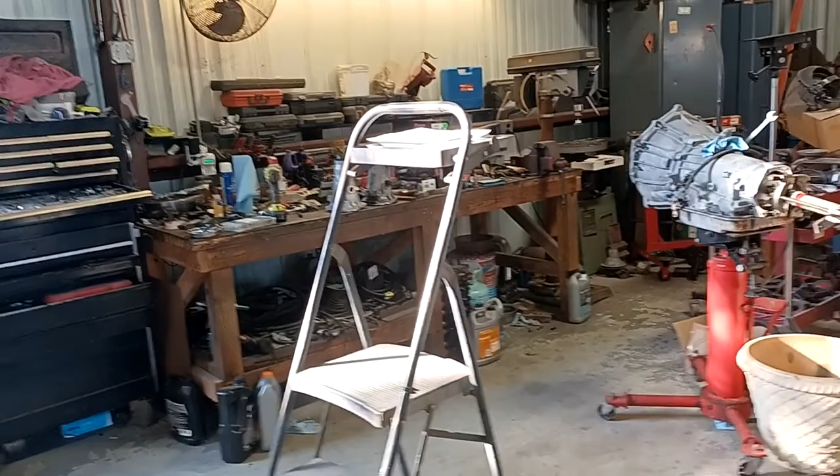Well, what I found is actually, I think, better, because I always try to stay away from little motors that end up going out in the future, and then you don't know how to get parts for it and this, that, and the other. You're right back to square one.

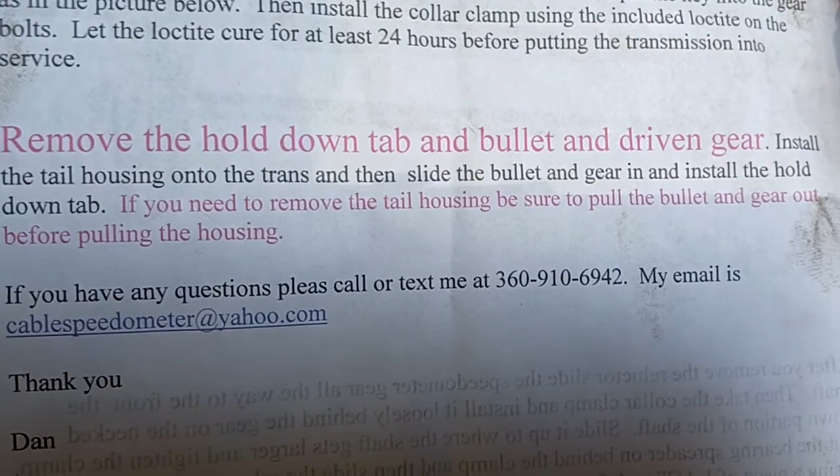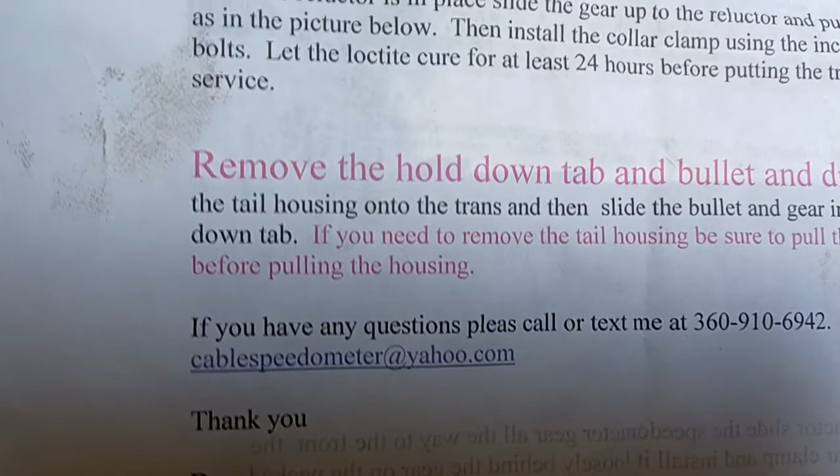Well, what I did find was on eBay, there is a guy. Let me give you this guy right here, right now, in case you don't want to watch any more of me rambling on. It's cablespeedometer at yahoo.com, or call Dan at 360-910-6942. That's 360-910-6942, and it's cablespeedometer at yahoo.com, go talk to Dan.

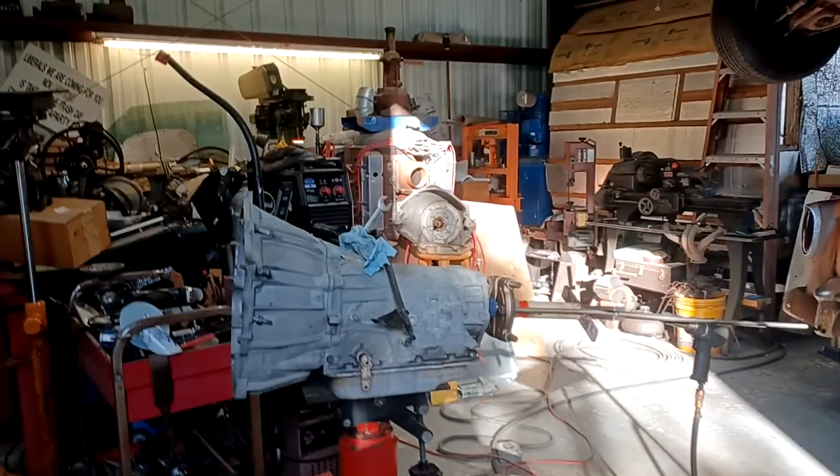I actually ordered this all off of eBay. He's gonna need the gear ratio in the rear end, and he's gonna need your tire size before he can sell it to you. Now I'm not gonna lie to you, it was not cheap. This whole setup was about $500, but it's gonna solve this problem we got about being able to make a cable run off of this.

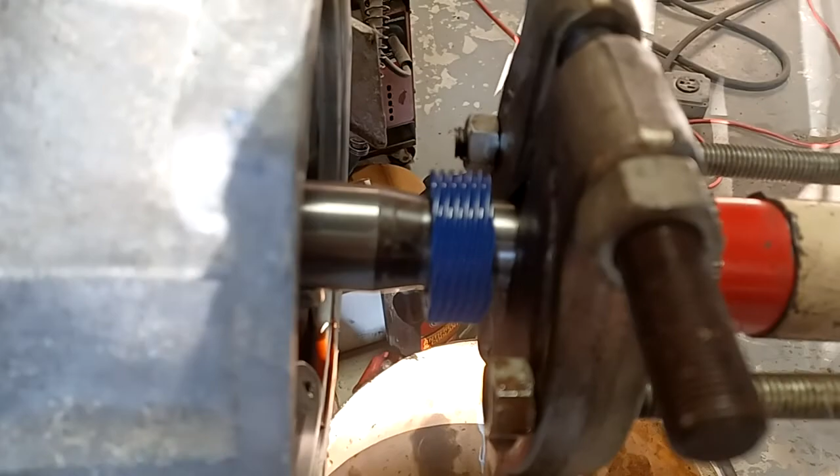So here, let me show you what came in the package. First thing I got is there's a new gear right there. There's also a collar right here, we'll go over that in just a second, what that's doing. I got a brand new tail housing.

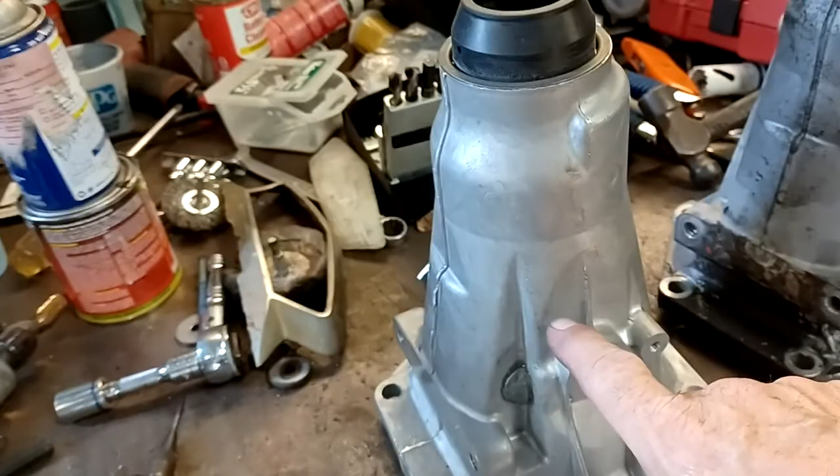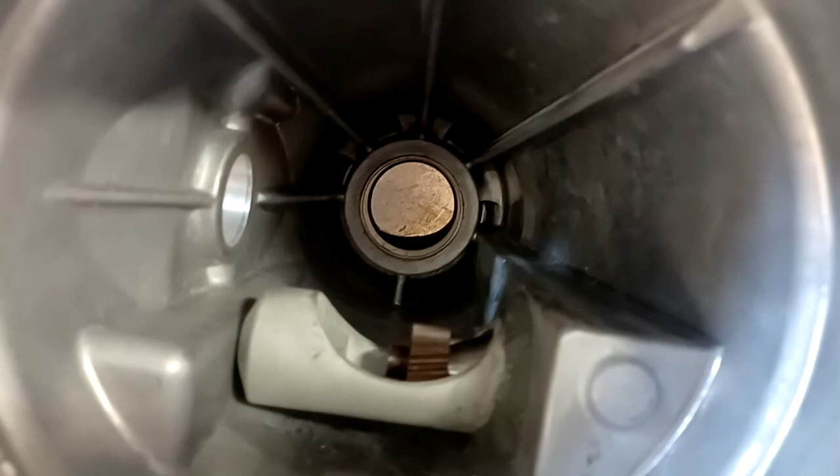It has the factory hole for the factory speed sensor, because you're going to need that with the LS. But if we flip it over, it's been modified to take a speedometer bullet, so that a regular mechanical speedometer will work forever. It'll never have a problem doing it this way.

And I can do the same thing here with a mechanical unit and zero problems out of it, other than every now and again you got to replace the speedometer cable. Okay, so let me show you how this comes apart and goes back together. He was very nice to include a nice instruction set with this.

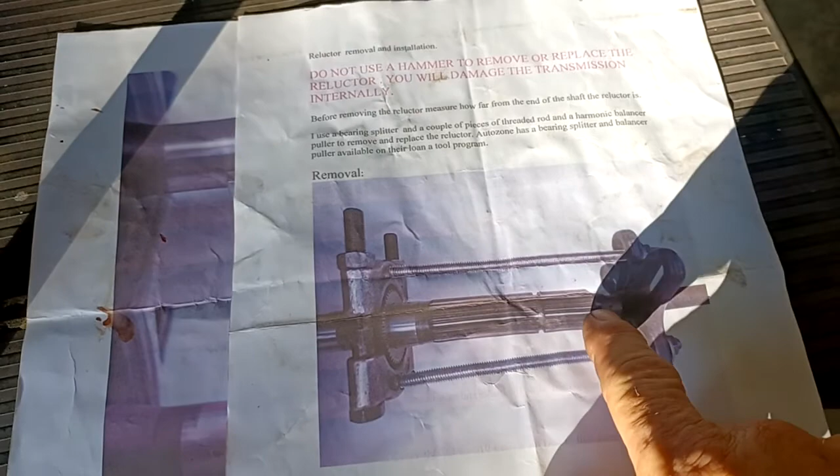Let's go over it. The first thing you're going to want to do is remove the reluctor ring. Measure the distance between here and the reluctor ring so that you put it back in the same spot. It's not that imperative, but let me show you another thing.

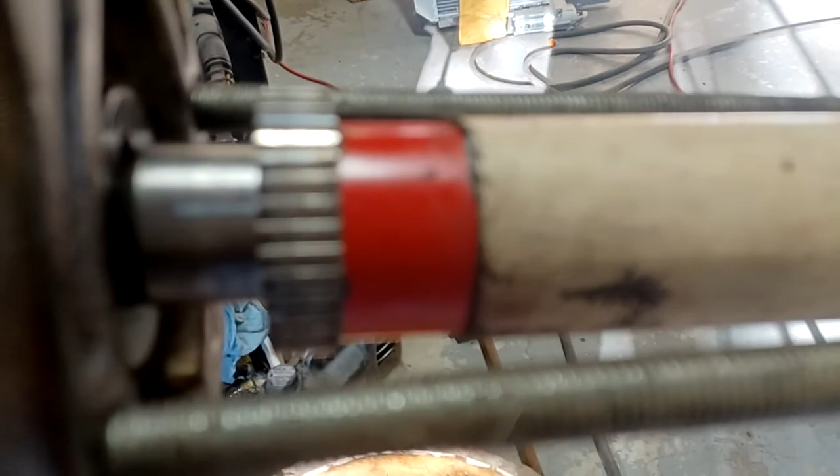I pulled mine off, and if we look carefully, focus right there, you can see a witness mark where this reluctor ring used to sit right there. So I've got about the distance of this to cover to put it back where it was at.

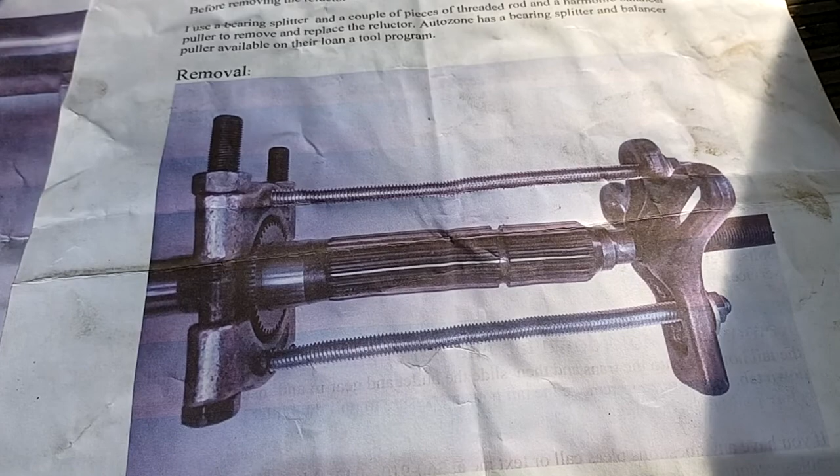Okay, so you're going to use your puller like so to get the ring off. Once you get the ring off, what we're going to want to do is put a setup like this.

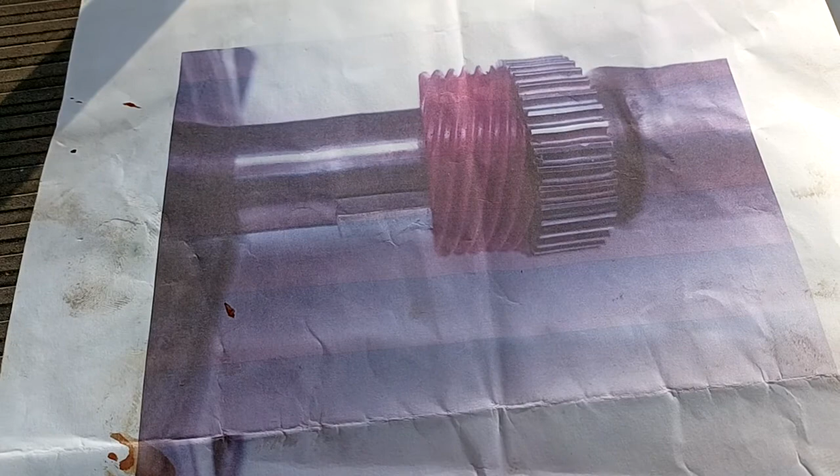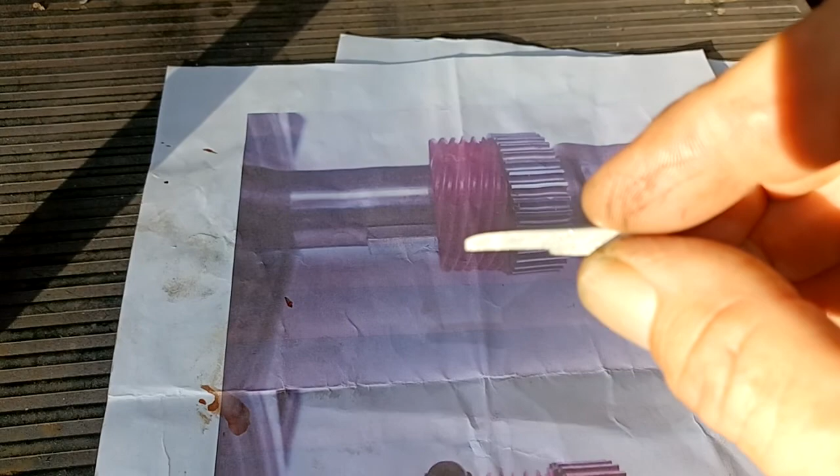First thing that's going to happen is that we're going to put the gear on, and you see this little keyway right here? That little keyway has a step to it. You see the little step? Now I clearanced it a little bit to make it easier for me to slide this in, okay?

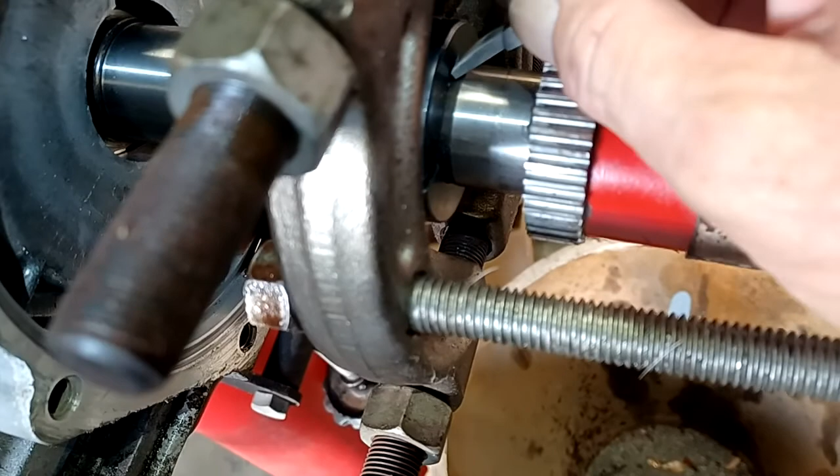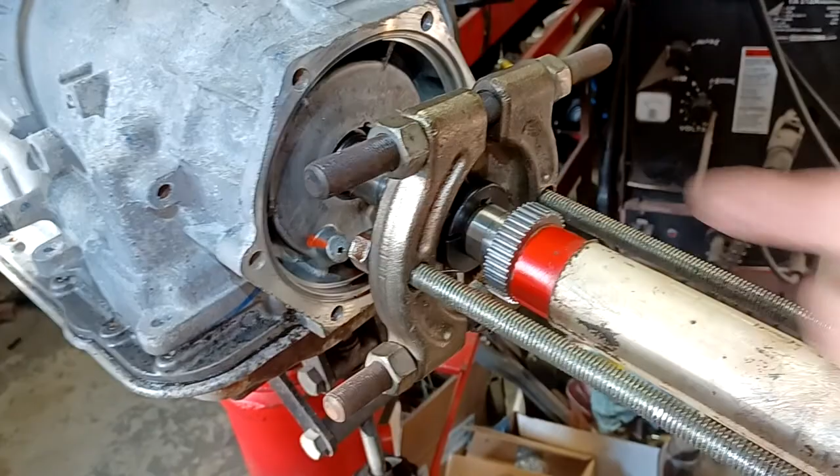That little clearance right there is actually for this little ramp right here, in which I have this collar crushed up against right now. The reason why that collar is sitting the way it's sitting right now is because this is the apparatus I need to push this reluctor ring back onto the shaft without hammering that shaft into the back of the transmission.

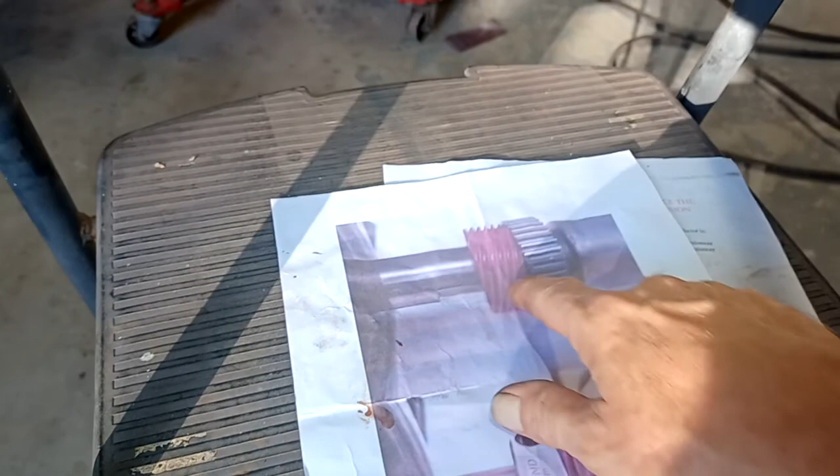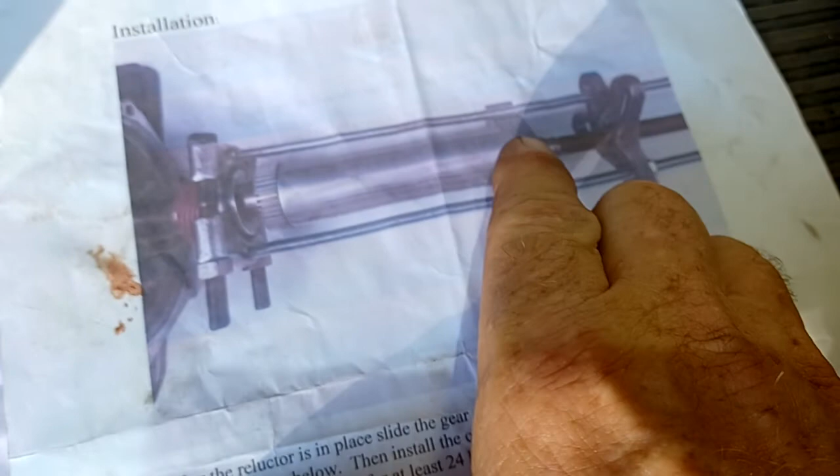And he clearly warns, do not hammer or you will destroy it. Okay, so after we put this on, we move this over to this side, right on that little ramp that I showed you. And you can see right here how he's got that, and that allows you to use this tip right here on this pipe.

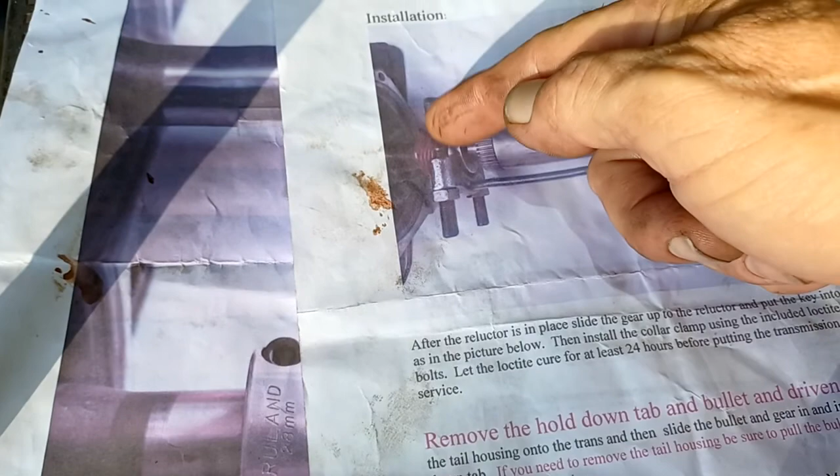We're not pushing on the transmission shaft at this point. All the force is right here on this part, and this point is pushing on this pipe, pushing this reluctor back onto the shaft. Okay, so that's how you get it back out on the shaft.

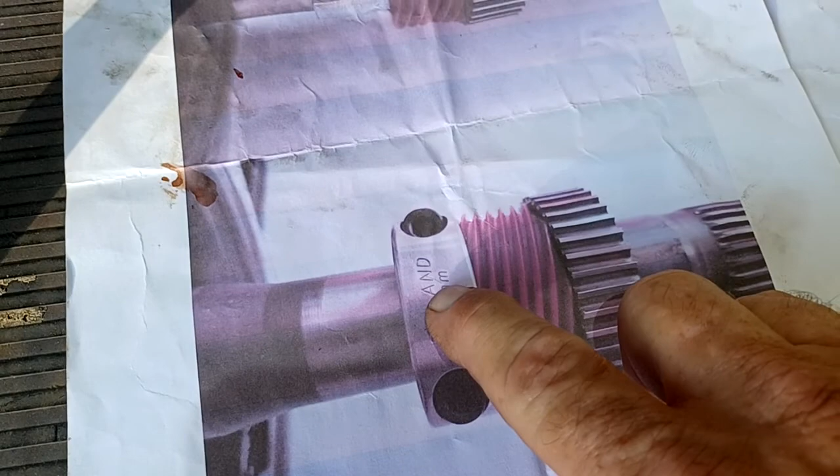And then when you're done getting it back on the shaft, you'll have it assembled just like this. This thing right here is pinching this into place. This is just holding that to keep it from spinning. Pressure between here and here is holding it to keep it from rocking. It's probably about half of this is actually on this part of the shaft, and the other half is kind of hanging over this direction.

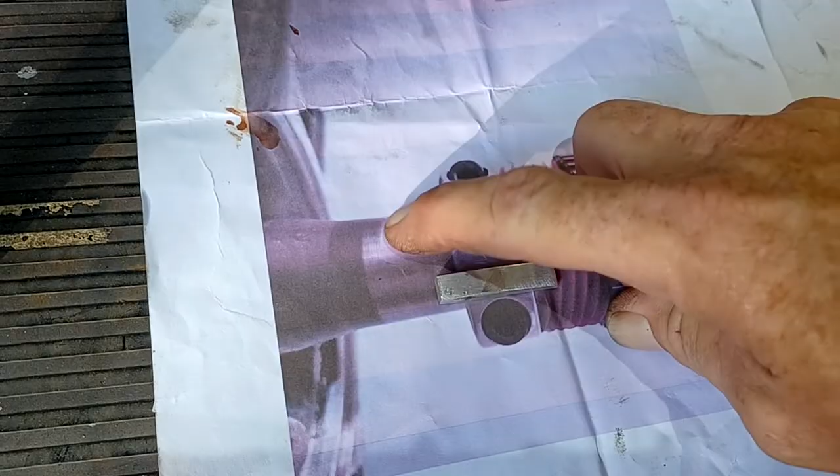All right, guys, well, that's what I got for you today here on how to make your LS swap actually use your cable-driven speedometer so that you can, focus, boy.

This phone does not focus very well. I'm not in love with it.

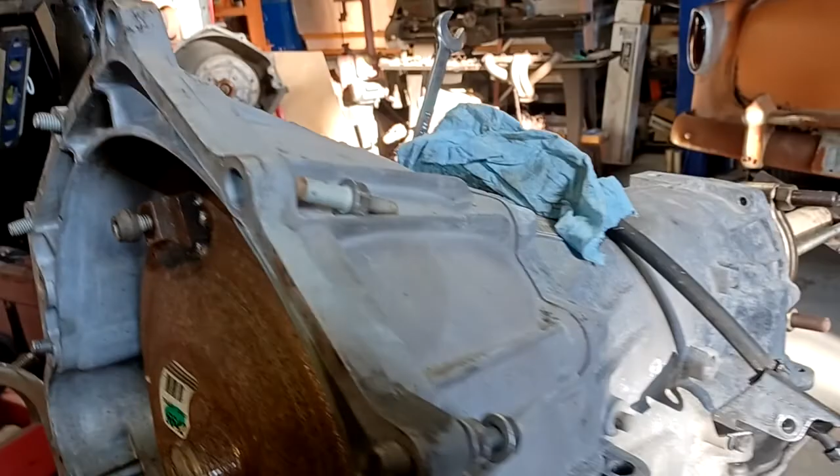All right, so anyway, like I said, this way you know now how to make a cable-driven speedometer that you might not be able to use an electronic driver on, or might not want to use an electronic driver on, and we have a way to actually make the cable work. Because like I said, that right there has a big, long rectangle speedometer, and it's just gonna take something different.

And just like that, it's back in place. All right, guys, y'all rock on, rock on, rock on. And I'm gonna get my LS on. Talk to y'all next time.